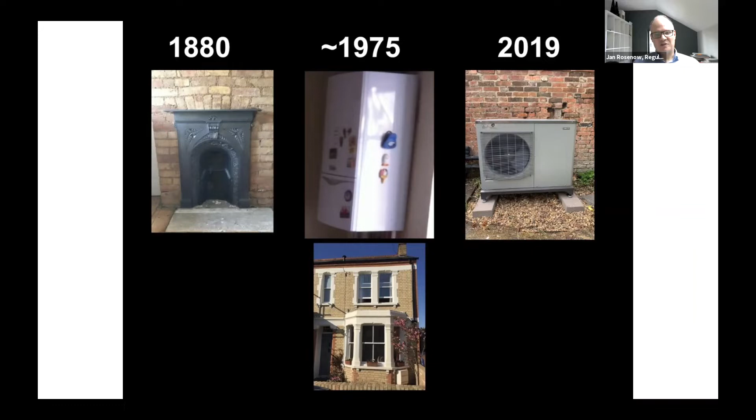When I look at heating, I look at it from a very personal perspective. Heating and buildings is a deeply personal issue, and that's why it's also quite complicated, and why we haven't done enough over the last decades. We've done a lot in the power sector, but not so much on heating. This is my own house in Oxford, and you can see over the last 140 years how it has changed, with a coal fire, then a gas boiler, and now a heat pump and energy efficiency. This is the kind of transformation we're going to see across the European building stock over the next 20 to 30 years.

I'm going to do three things in my presentation. First, I want to talk about the Green Deal and what it is, very briefly. Then I want to talk about the key issues around buildings and why they are so important for meeting climate neutrality. And finally, I'll just point to some of the solutions. I know the other speakers will spend their presentations on very specific solutions, so I'm just going to touch on them and leave the floor to the other speakers to explain more clearly what the solutions are going to be.

So on the first issue, what is the Green Deal? Well, really, in a nutshell, it's about meeting net zero emissions goals by 2050. The Green Deal at European Union level is a raft of legislation announced by Ursula von der Leyen in 2019, on how to meet climate neutrality by 2050.

So we have a clear goal, and I think about this very much like climbing a very large, very high mountain, and you don't know exactly how you're going to get to the top. We know we need to get there, but we don't know exactly what the road is going to look like, or what's going to be around the next bend. Different countries have taken different approaches. I know there are many people here from the UK, for example, and the UK just launched its 10-point plan. Other countries take a different route, but we all have to get to the top of the mountain, which is climate neutrality by 2050.

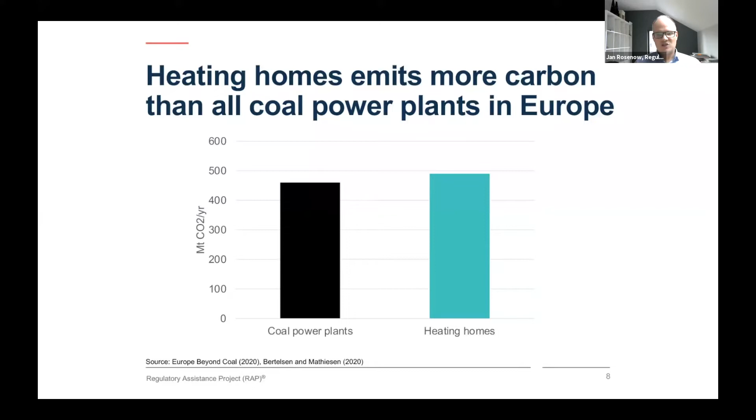So why do buildings matter? Why do we talk about buildings today? Well, the answer is that heating our buildings is extremely carbon intensive. Just to put this into perspective, heating our homes in Europe emits more carbon emissions than all the coal power plants still in operation in Europe. That's not even looking at the buildings we have in the service sector or in industry, just our homes. So we have to decarbonize heating to meet climate neutrality goals by 2050, there's no way around this. The main reason for this high number of emissions is really just because we have a large share of fossil heating still being used, about 75%.

What does this mean concretely for the European building stock? Here's some numbers I've extracted from a very impenetrable document from the Commission, the impact assessment, a very long and very technical document. But what it shows is that we have to reduce emissions from buildings by about 60% at least by 2030 compared to 2015.

That's a huge endeavor to achieve, but that's what we need to do to meet climate neutrality goals. Second, we need to increase the number of energy savings per year by about 10 at the current rate. And then finally, by 2026, the Commission expects that 4.6% of all homes every year will have to switch to low carbon heating. So a huge target in front of us.

But the good news is we have solutions that can achieve that, and we cover some of that in the other presentations. I just wanted to highlight two particular aspects that I think will be important.

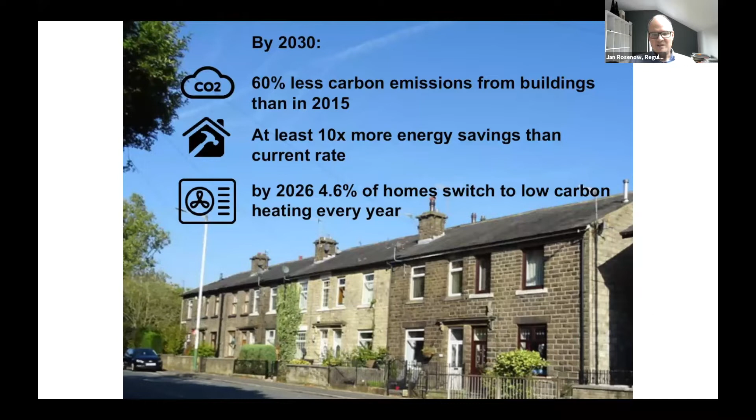Two aspects are important in this initiative. First, it's all going to be about smart buildings. Increasingly, we will transition away from combusting fuels to electrification in buildings, and we will have smarter systems that allow us to monitor and manage our buildings much more closely, taking advantage of buildings as batteries, as grid interactive buildings that can help us integrate renewables and balance the system.

The events in Texas last week are a very good example. Had the buildings been more efficient and had we had more efficient heating equipment, we could have avoided at least some of the impacts in Texas.

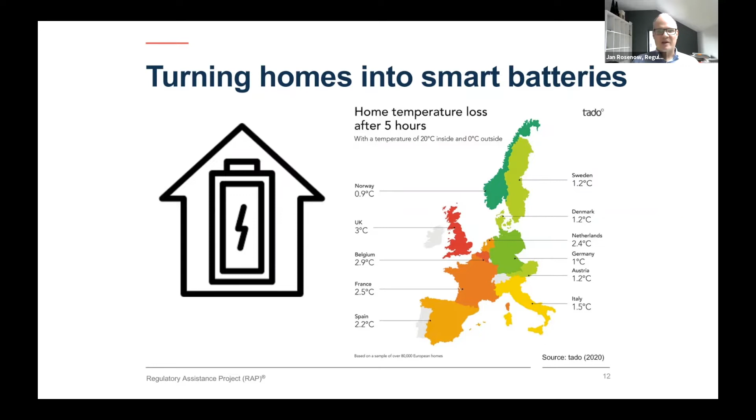Next slide, please. Another really important aspect, and that's my final slide before my conclusions, is regulation. A lot of this will require new legislation. It's not going to happen by simply relying on information and a bit more subsidy, and the Commission recognizes that. National governments also recognize that having minimum standards for all buildings that are tightened over time is an initiative that is now getting traction across Europe.

The UK government has already implemented something like that a long time ago for privately rented buildings, for example.

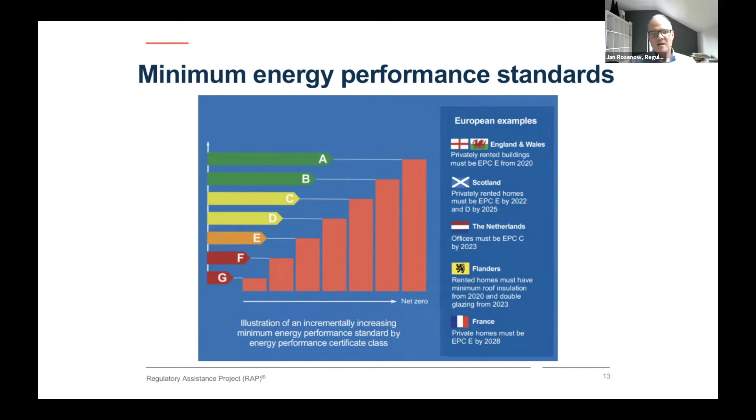Next slide, please. So my conclusions and takeaway messages for this event: buildings really do matter for net zero and for meeting climate neutrality. You've seen the slide on coal power plants and emissions as a reminder. Efficiency and electrification will be critical in all of this.

District heating is another important technology, but it's going to be about efficiency and electrification, at least in the next decade, that's for sure. Buildings can and should be grid interactive. We have an opportunity there that we need to take advantage of. And finally, we will need regulation to achieve the scale of change required.

Remember the slide with the three targets for 2030. It is inconceivable that we're going to meet any of that without having a regulatory backstop in place that really gives the market the certainty that it requires.

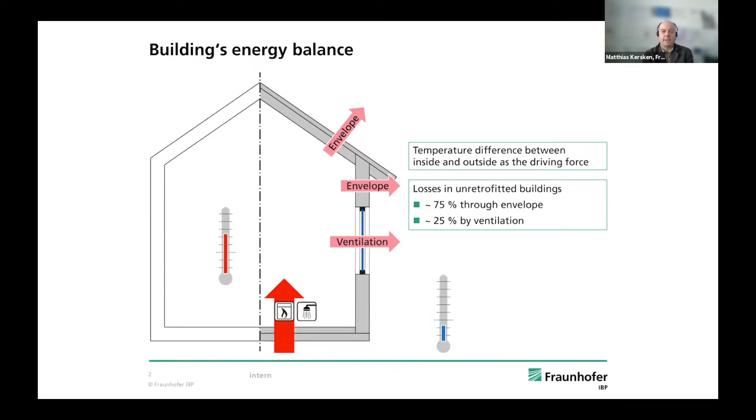They're not correlated to each other, so you can implement one and not the others. The order I'll be showing here is arbitrary.

The first mechanism, which is probably the most common one, is insulating the building envelopes. This has a large impact, but also is quite costly.

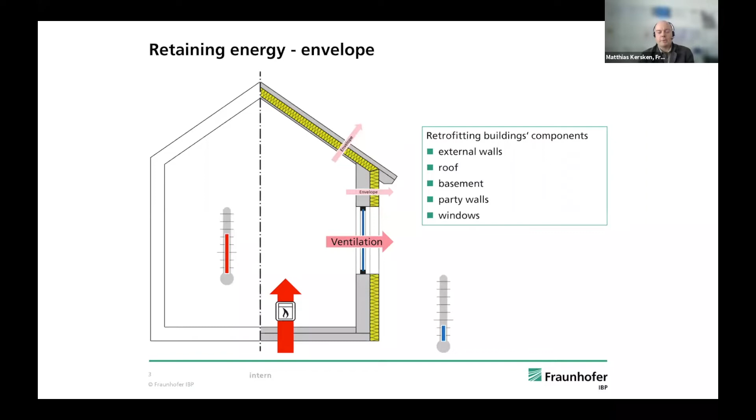The next mechanism is replacing the ventilation through window with a mechanical ventilation system with heat recovery. Earlier, these systems were very difficult to use in refurbishments because of all the required ductwork, but nowadays they are very efficient decentralized systems that require minimal installation effort.

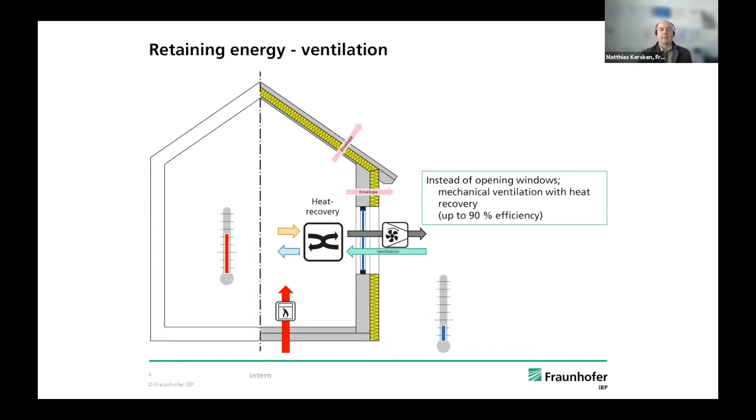The third mechanism is to reduce the driving force for the heat losses, the temperature difference between inside and outside. Since raising outside temperature is exactly what we want to avoid, we need to reduce inside temperature. But still, we want to be comfortable within our homes.

So we can only reduce the temperature in rooms or in times when the building is not occupied. This comes with some restrictions because we have to heat up the buildings or rooms before we re-enter them, and we need occupancy information to be able to do that.

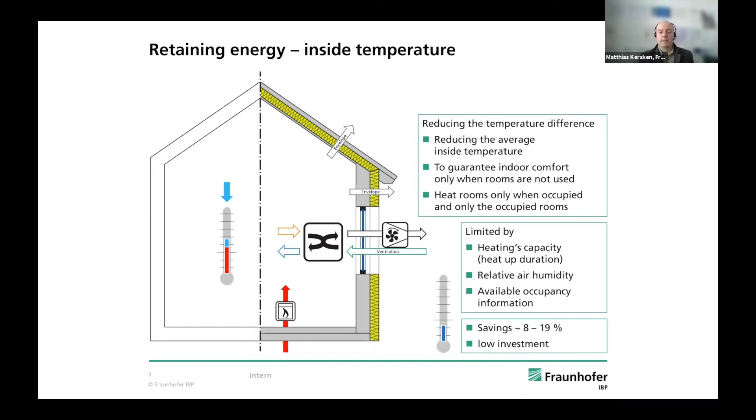Achievable savings go around 8 to 19%, which is good, not huge, but what points out here is the low to none investment that is necessary to achieve these savings.

The increasing amount of heat pumps and other electrical heating systems leads to a merge of the huge thermal energy market into the electrical energy market.

First, that might sound like a huge problem, but we have to consider that efficient buildings lose very little heat and still have a high thermal mass. So we absolutely have no problem in modern efficient buildings to switch off the heating for several hours to avoid peak load hours in the grid.

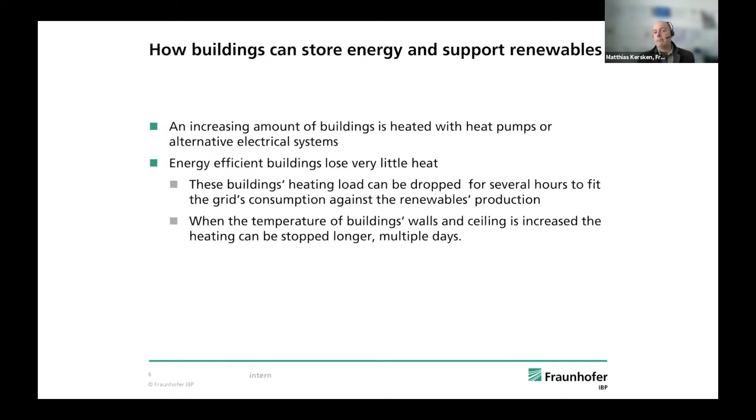Also, there are concepts on the market partially even that allow to turn off the heating for days and multiple days. So what we typically have, we have an overproduction, for example, around noon from PV production, and the morning and the evening.

We might have higher loads in the building from heating and domestic hot water. So what we want to do, we don't want to fire fossil coal plants or build huge batteries for heating our buildings, not like building lithium batteries.

What we want to do is shift those loads that we cannot cover by renewables to the part where we have overproduction, so where we are producing electricity that we cannot sell. So by shifting these loads to that times, or by dropping the loads, we can achieve a very good merge between the production and the consumption.

And by so, we can see how the already mentioned huge consumption of buildings can contribute to the stability of grids, including a lot of renewable energies. Thank you.

Thank you, Matthias. We'll now take a dive into technology and the three core measures that make a big energy efficiency impact in buildings. That is heat pumps, insulation, and smart controls. And first up will be Thomas Nowak, the Director General of the European Heat Pump Association.

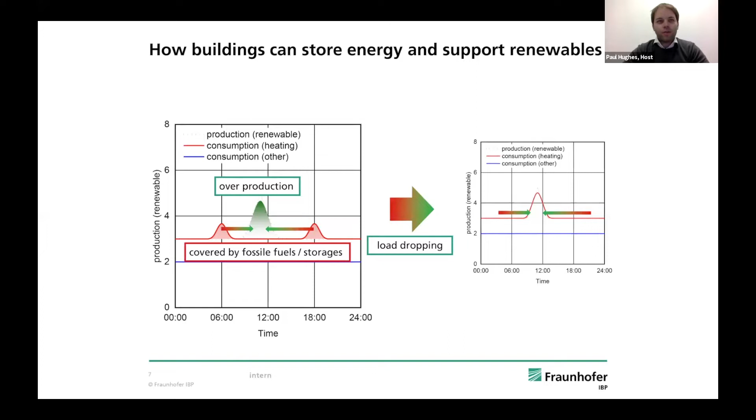Over to you, Thomas. Yeah, thank you very much, Paul, and thank you very much to Jan and Matthias, because you created a great background. We can look at my first slide.

I will talk about heat pumps as a technology and what they can do for the Green Deal and for the energy transition. Can you show the first one then? Because then I would have some illustration. Otherwise, I can also just talk about it.

We are in the era of having 5, 6, or 7 heat pumps in your building. You have heat pumps in white goods, you have heat pumps in your electric car, you have heat pumps in your fridge, and you have heat pumps in your heat pump system, as it was already shown.

And the benefit of this is that we can make our life more comfortable by having these heat pumps, because they provide comfort to the end user building. And at the same time, they have some additional benefits that you would see on the second slide.

And that's what we have called them here balancing technology. So it's a demand side load that we can integrate into the system. And my previous speaker talked about heat batteries, and that's what we actually see. We have done—we have looked at statistics from our own data. So you can just go to the next one.

We have looked at statistics from our own data, and we can say that heat pumps have the potential to switch between 1 and 3 terawatt hours of electricity from peak to off-peak hours.

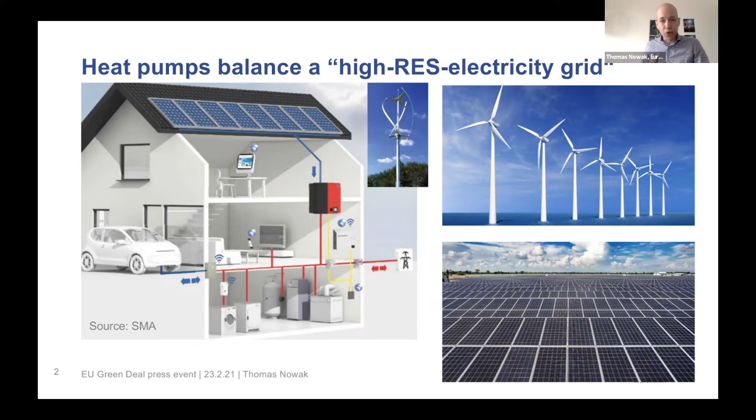There's also an additional benefit: no emissions at the point of operation. I think this health aspect, especially after the COVID pandemic, will actually become more important. I talked to a planner yesterday who is doing schools, and all the new schools in Germany where I live will have ventilation systems and air cleaning. So this aspect of air quality is increasing.

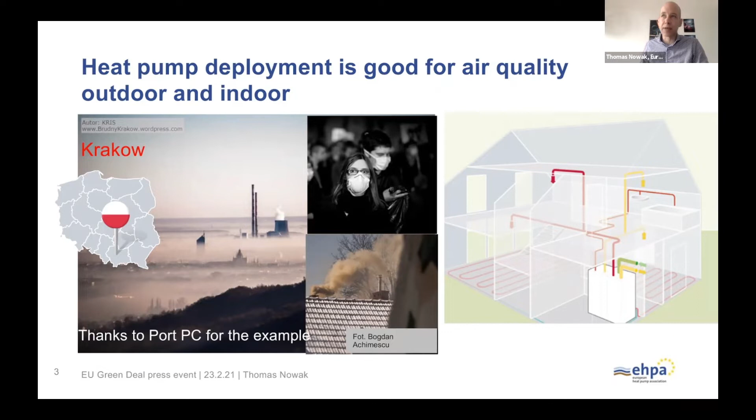Heat pumps are actually developing quite nicely. We have seen continuous growth for the last 8 years. We are now at 1.6 million units per year, and we have a stock of 14.8 million units. You have to put this into context: we have around 115 to 120 million building units in Europe, so we are somewhere above 10% at the moment.

That's when the Green Deal that we see on the next slide, Mr. Timmermans smiling at us, came into the discussion. He said that the housing renovation plan, now called the renovation wave, will be the flagship of the European Green Deal. So Ursula von der Leyen, Green Deal, Timmermans, EU renovation plan.

What does that mean? We have a document, and I made it very simple: one sentence. The EU system integration strategy is based on another impact assessment, and it concludes that by 2030 we will have 4 times as many heat pumps as we have today. So somewhere between 48 and 57 million units, and that is huge because it means we have to grow this market by 19%. Industry can deliver that, but is the market ready to create the demand, and are we ready to provide these units in the required quality?

The second thing is the renovation wave, which has many aspects that Jan has shown already, but one important point I wanted to single out is the aim to renovate the 35 million least performing buildings. That's super important when it comes to heat pumps, because it means those buildings that today are not fit for purpose move into the area of being suitable for heat pump deployment.

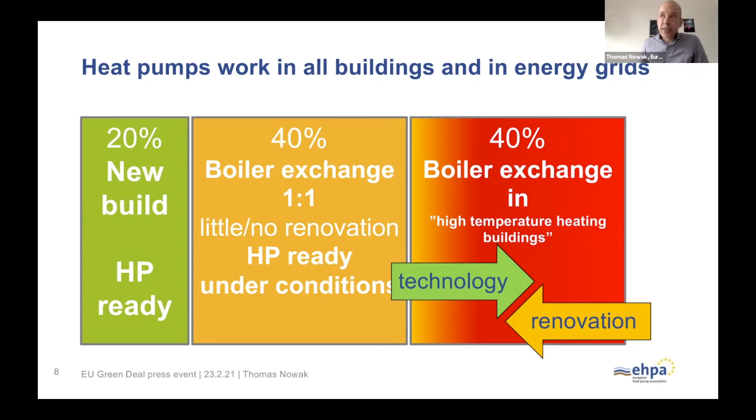So last, what do we need for that? We need to activate the end user demand. We see at the moment a lot of subsidies are paid for end users to encourage them to invest into heat pumps, but we think it would be better if the market framework would actually lead to using more efficient technology with renewable energy as something the user wants. And we think it needs some regulation changes.

We need to look into energy taxation and a CO2 price. We need to look at a value for flexibility. And in order to make it simple for end users, we need solutions that are one-stop shops and make it easy to trust that the solution they choose is a good one. Thank you for your attention.

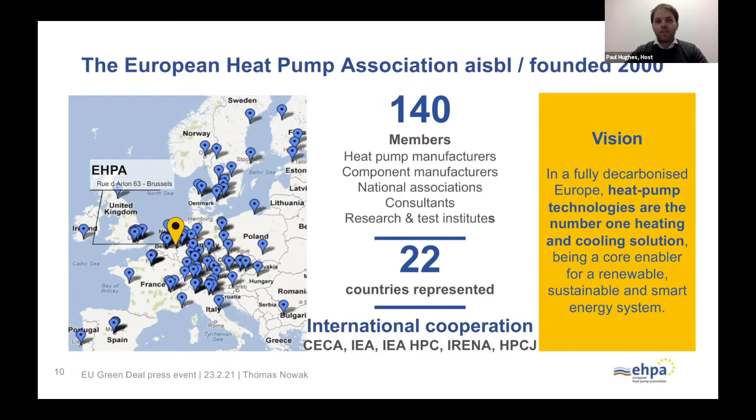Thank you for the great foundation on how heat transfer happens inside a building and the heating technologies. I'm going to talk you through the benefits of insulation and how energy efficiency is a pillar of both the European Green Deal and renovation wave. Maybe one first word on Knauf Insulation.

In Knauf Insulation, we focus on 4 main technologies: glass mineral wool, rock mineral wool, green solutions, and wood wool, all serving energy efficiency and insulation in general. Next slide, please.

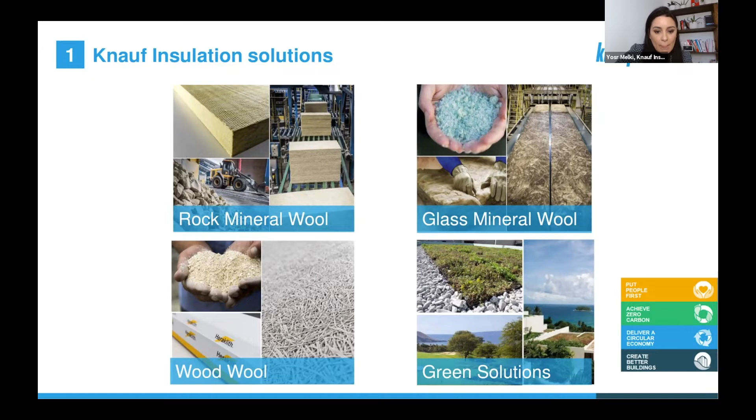As explained by the previous presenters, there are many complementary solutions to make buildings energy efficient. One of the very important factors is making the envelope of the building energy performant. It's not only to optimize other solutions such as control systems, but it also makes buildings safer and more comfortable while lowering the energy bills. Adequate levels of insulation can multiply the time by which a building's temperature can remain comfortable after heating was switched off, and that's the battery logic.

The evidence shows that deep and high quality renovations of buildings can drastically reduce energy use and help energy systems become smart, flexible, and renewable. As Thomas said, if you are building a new house, it makes no sense to do it non-passive, but for old stock, it's very important to insulate, and to insulate heavily. I would even say going for deep renovation rather than small renovations. In Knauf Insulation, we provide different solutions for different building types because we provide the right solution for the right application. We can go to the next slide, please.

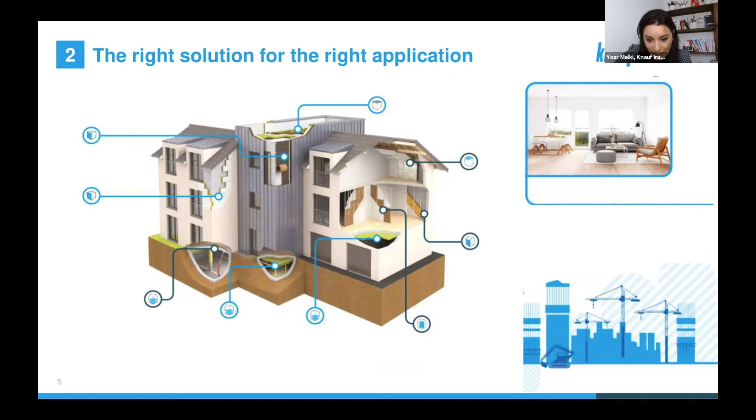Beyond energy efficiency, the products contribute also to the sustainability of buildings. Next slide.

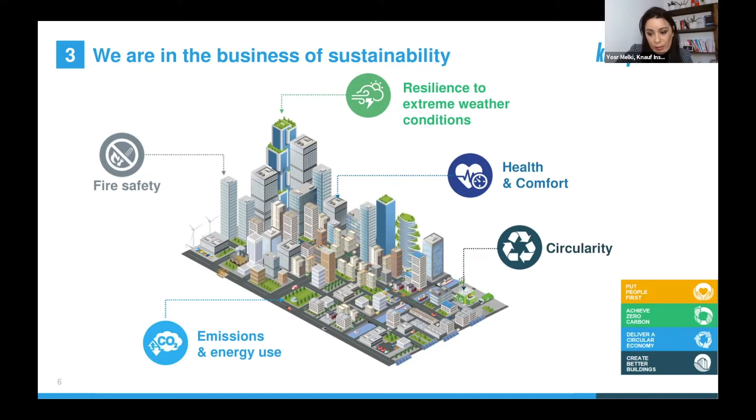Here you can see what sustainable building means. It's a perfect balance between the economic part, which is the energy bill, the environmental part, and the people part, keeping the place safe, healthy, and comfortable for the occupants of the building or house. Next slide, please.

As you all know, and you might have heard, Europe has decided to lead the green wave, the Green Deal, and for sure other regions will follow. €1 trillion is being allocated to the Green Deal over the next decade, a 55% reduction by 2030, and carbon neutrality is the objective by 2050. The top line message is clear: go big and go buildings.

We will have a renovation wave that has been discussed before, and it's not only about renovation, it's also about the need for a cleaner construction sector in general, and it's also about carbon neutrality and circularity. Next slide, please.

You might also have heard over the last few weeks or even months during the hearing of the upcoming Commission that Europe needs to step up its effort to decarbonize our economy by 2050. And you have heard a lot, I hope, about the need to focus on energy efficiency. We believe, as the Alliance, along with many other stakeholders, that we need to focus on energy efficiency first.

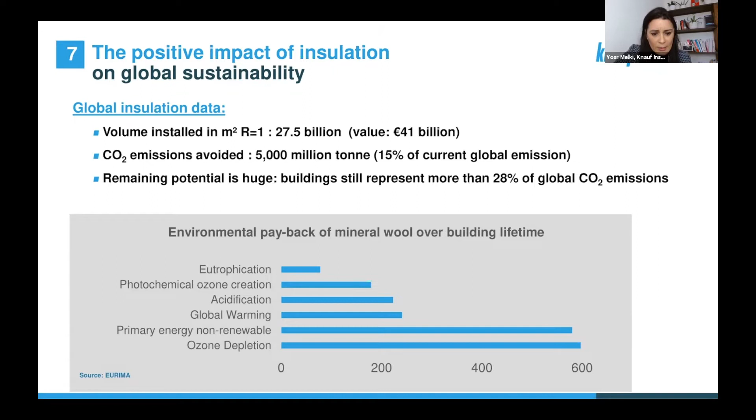Renovating European buildings is a key component of the Green Deal and the renovation wave, because buildings represent 40% of the energy consumption of Europe, 36% of its CO2 emissions, and 75% of the building stock in Europe is inefficient.

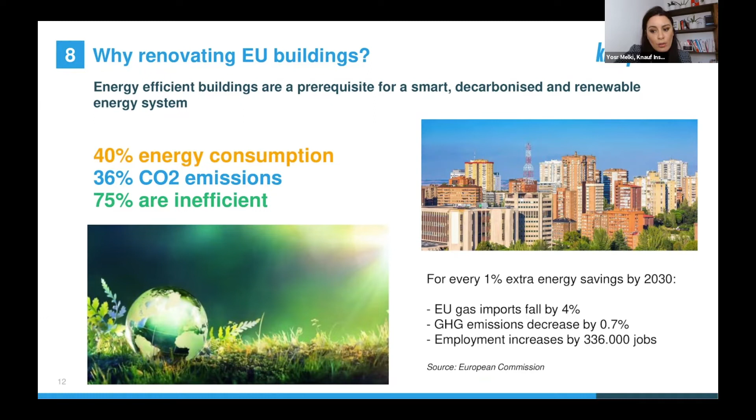For every 1% extra energy saving by 2030, gas importation for Europe will fall by 4%. GHG emissions decrease by 0.7%, and employment will increase by 336,000 jobs. So the renovation wave is a win-win situation for the climate, for employment, for the economy, and also for the homeowners and building owners who are using their buildings on a daily basis.

Last slide, please. So here I am inviting you to read a study we sponsored with Politecnico di Milano, and it shows that deep and high quality renovation makes it possible to reduce energy consumption in our buildings by up to 80%, and as a result reduces the energy bills.

But that's not all. Increasing the thermal insulation of walls and roofs considerably lengthens the time interval when the temperature inside a building remains comfortable after the heating has been switched off. The study conducted by the End-use Efficiency Research Group, eERG, of the Politecnico di Milano shows that heating for just one day to the upper end of the comfort zone is enough to maintain a comfortable temperature for a period of up to 3 or 4 days.

This means that well-insulated buildings offer the necessary flexibility to receive energy when it is available, attenuating the peaks in power demand on the electricity grid when all inefficient buildings demand power, and properly exploiting moments of overabundance and scarcity of the supply of energy from renewable sources.

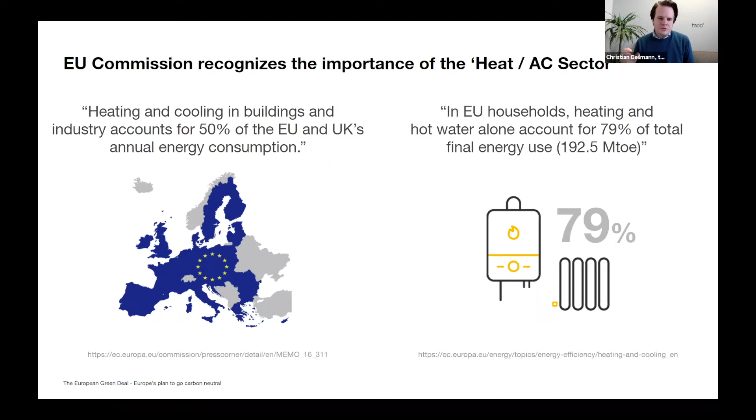And the second quote, which I chose from this report: in EU households, heating and hot water accounts for 79% of final energy use. Due to these 2 figures, we strongly believe that the heating and air conditioning sector is a really important one for the Green Deal.

And how we at Tado envision innovation in this space is what we see here. So today there are about 220 million homes across Europe which have heating air conditioning systems, and these systems often sit in the basement since 10, 20, 30 years, and they're really ancient technology.

And we believe they should be all intelligent, they should be connected, and they should use data technologies like geofencing technology, open window detection, integration of weather forecast. They should be model predictively controlled. And last but not least, they should be integrated into the energy grid. And so this all leads to energy efficiency.

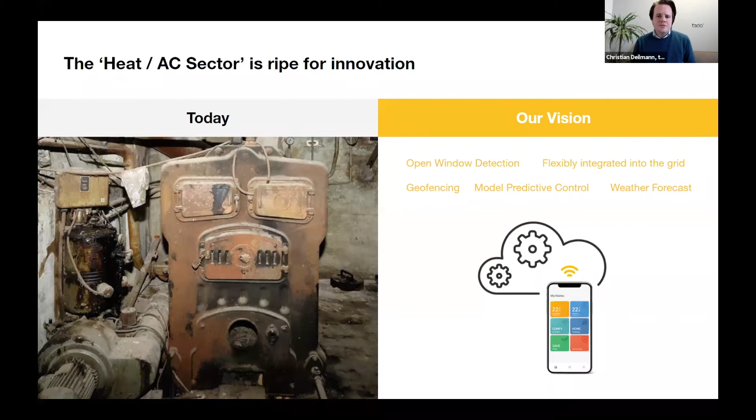On the next slide, we show kind of the energy efficiency across our households, our customers here at Tado. By now we have installed, we manage over 1 million of these smart thermostats and respective heating air conditioning systems. And on a monthly basis, we monitor the energy savings of our different homes.

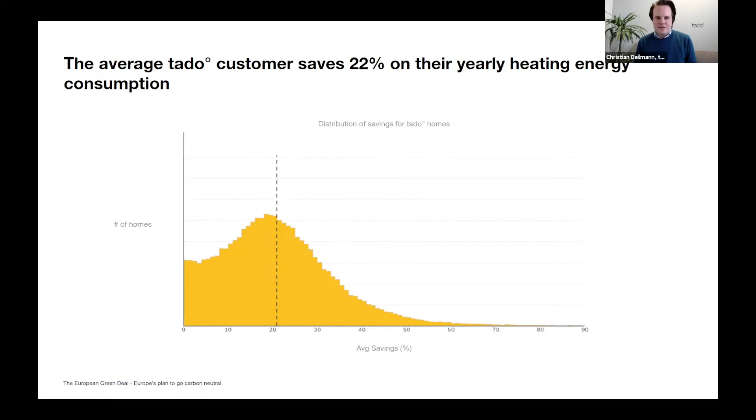On the next slide, this is basically the message that when we think about the Green Deal, when we think about investing €1, we really should think into how this euro can be invested in the most wise way.

Where do we get the most amount of efficiency from one euro invested? There are multiple sources, but what's clear is that all of these measures are very important. Insulation is really important, new heating systems are really important, and intelligent control is really important. It actually has a very low amortization time, so you get a lot of efficiency per euro spent.

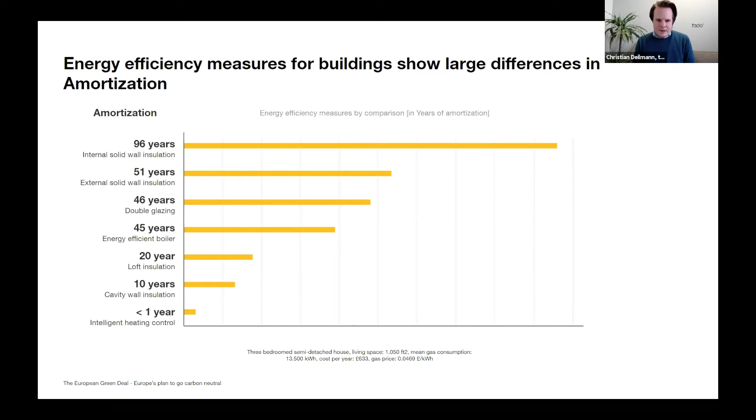These connected heating and air conditioning systems are not only there to improve efficiency, but also important for the future energy grid. In the future energy grid, which will be decentral and where intermittent energy sources like wind and solar play an important role, energy demand needs to be flexible and react to times when the wind blows and the sun shines. Since the heating and AC sector is such a big consumer with such big capacity in the European market, and is steadily being further electrified, it has huge potential for flexibility in the energy grid.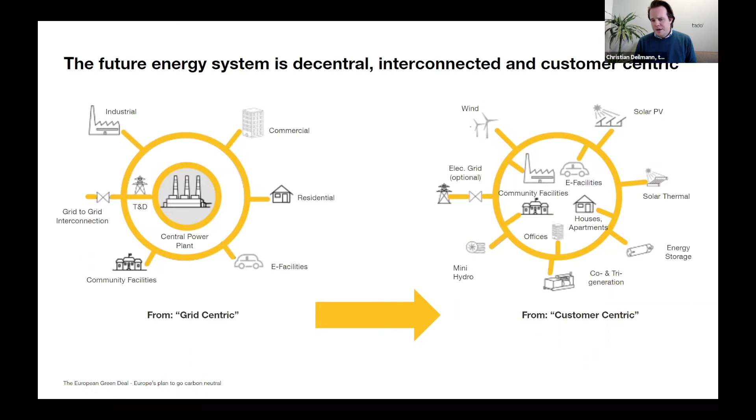So what is the tado way? What's unique about tado is that we're the only solution out there with a cross-manufacturer platform. The tado system can connect any kind of heating and air conditioning system. In Europe and the UK, across 220 million homes, there are thousands of different systems installed from over 900 manufacturers, and tado is compatible with all of them. So 95% of homes across Europe can make use of tado.

So where do we stand now? What is our impact so far? By now, we have managed over 1 million smart thermostats and heating and air conditioning systems. All of our customers together since 2013 have saved over 466,000 tons of CO2 — equivalent to about 1 million passenger flights from Munich to New York City. In total, tado currently has over 4 gigawatts of capacity under real-time management in the cloud.

I wanted to say that we're still at the very early beginning. To really have an impact on CO2 reduction across Europe, the UK, and the world, as a whole industry we have to bring innovation into all the buildings out there. This is the mission we're on. Thank you very much for the time and listening.

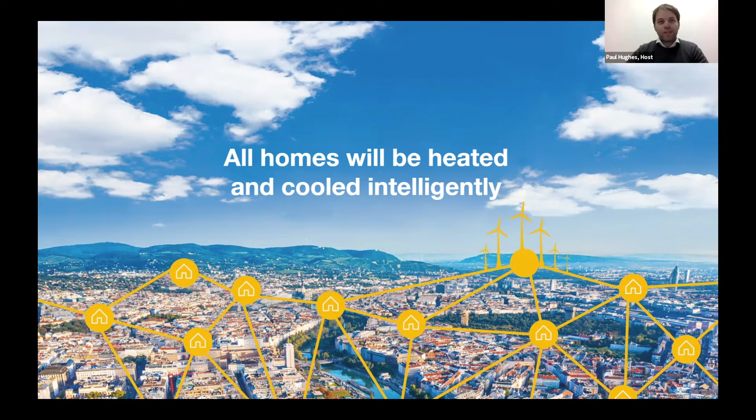Thanks a lot, Paul. If we go to the next slide, you'll see our vision at Sonnen, which is to provide clean and affordable energy for everyone. My aim for today is to talk about the new energy landscape, what we're doing at Sonnen, and how it relates to the smart heating world.

A few words about me: I am currently CIO and MD of Sonnen, a position I've held for 4 years, and before that I spent 13 years working for E.ON, a big German utility, where I finally led their demand response and renewable marketing division.

So what is Sonnen, so you get a good understanding of what we do? Sonnen is a leading provider of residential storage. We don't only manufacture residential storage, we also provide a full package to our customers — this is why we call ourselves the utility of the future. Sonnen is not so small anymore: we have between 700 and 800 employees and 3 manufacturing facilities, one at our headquarters in beautiful Bavaria, but also in Atlanta in the US and Adelaide in Australia.

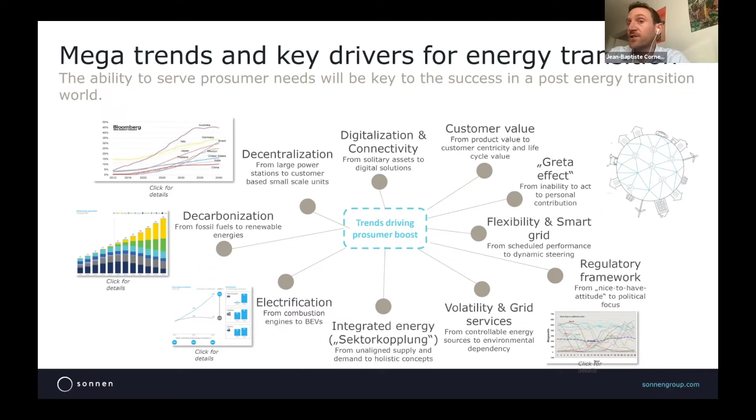On the next slide, we see the comparison between the old energy system — a big coal or nuclear power plant, depending whether you're in Germany or France — and a consumer at the end who just has a plug and doesn't really know where the energy is coming from.

On the right side, you see the new energy landscape, which is decentral, interconnected, and in the middle is a consumer, which we call a prosumer, because he has the option either to produce some of the energy he needs or to steer the way he consumes energy.

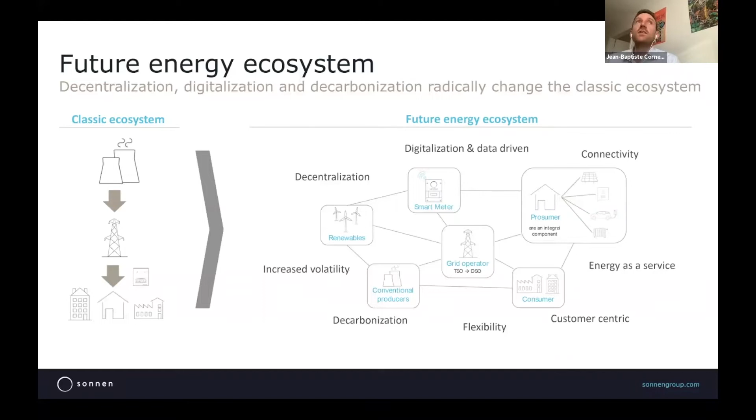So let's look at what we are proposing at Sonnen for our consumer or prosumer. We target the home ecosystem, meaning our consumers usually have a PV on their roof, a battery in the garage or cellar, and in new houses, a heat pump or some kind of steerable heating device.

What we're saying is we provide those prosumers with a full package. If you have a PV on your roof, you'll be 30% independent. If you have a PV coupled with a battery, you'll cover approximately 70% of your electricity needs. At Sonnen, we provide the remaining 30%, so you're 100% independent from a traditional energy retailer, and we do that at no cost.

How do we do that? We use your battery to provide electricity services or flexibility services. We aggregate thousands and thousands of electric batteries into what's called a virtual power plant. We gather the flexibility of these batteries and sell it either on the energy market or to the transmission or distribution system operator - it can be TenneT in Germany, National Grid in the UK - to help them stabilize the grid and support the energy transition.

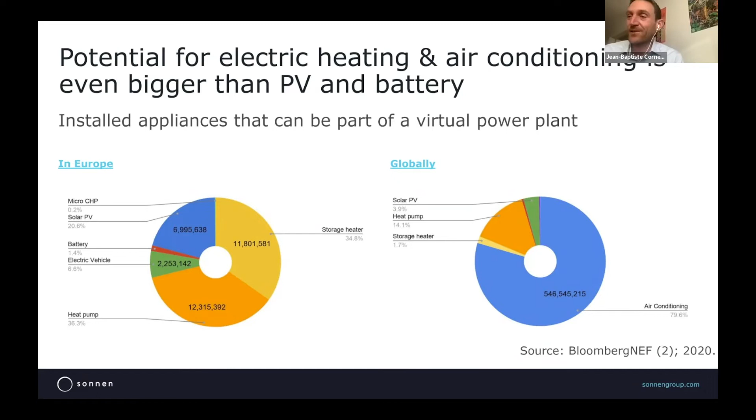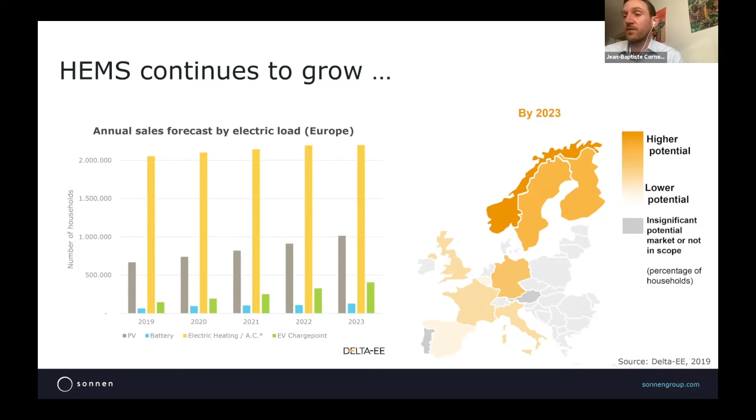Globally, you can add all the air conditioning units, wherever they are located massively. This potential is huge in the smart heating sector, and it's growing at a fast pace. Of course it depends on the maturity of the market, but it's possible today to support and foster the energy transition with small electric devices that you can steer, and the potential in the smart heating sector is huge. Thanks, that's about it.

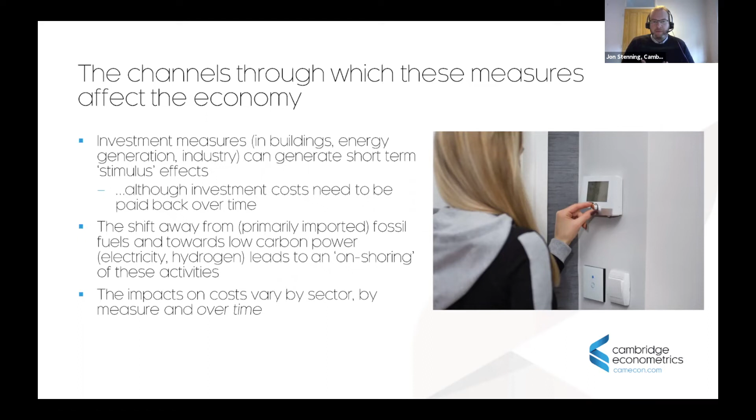There are also other long-term impacts in terms of changing the costs faced by individuals, by consumers, and by businesses. These vary, unfortunately, rather widely by sector, by measure, and over time. This over time factor is quite important and often overlooked. A lot of these technologies change the profile of expenditure, requiring higher spending in the short term but with a longer term trade-off of lower costs over time. An example being energy efficiency in homes, where we're asking people to invest in heat pumps or improving energy efficiency, hopefully with the long-term aim of reducing their energy bills.

Next slide, please. So those are some of the economic channels.

But these net impacts obviously do hide some of the detail. There will be winners and losers, and there are large reorganizations within sectors. The power sector is perhaps the most obvious one we've already seen, where a shift away from fossil fuel generation and towards renewables has impact on local communities and on coal regions, for example. The decentralized nature of power generation has led to a different economic geography of these industries over time. Inevitably, there will be jobs lost in existing high carbon industries like coal regions, as well as new jobs created in new sectors and activities.